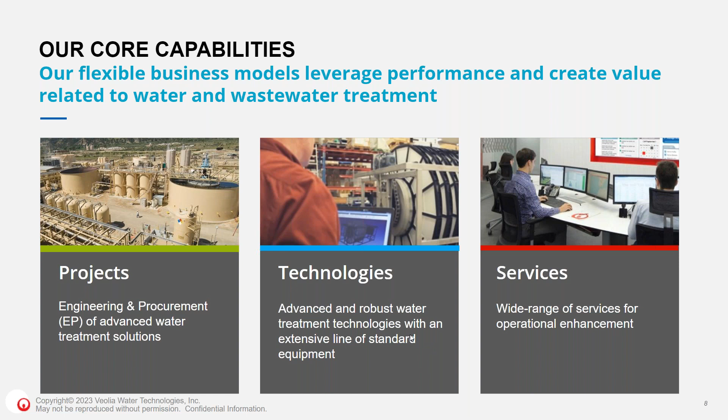So a little bit about Veolia Water Technologies. We provide water and wastewater treatment services, projects, and technologies to a variety of customers. We do that through engineering and procurement by putting processes together that are able to take influent and treat it to a required effluent specification. We also invent, develop, and improve and install really innovative technologies within this space. And of course, we support our customers through a wide range of services related to water and wastewater treatment. And we work in a variety of industries, industrial as well as municipal, and you can see those on your screen.

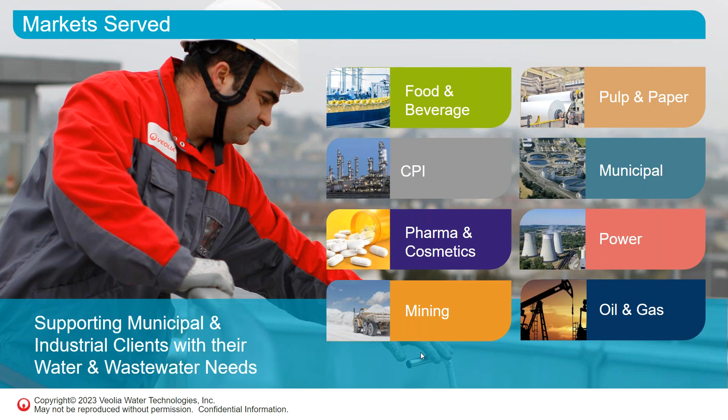Now, when we look at pulp and paper, we're a very unique company. We are multifaceted in what we do.

We have, of course, a wide range of water and wastewater treatment capabilities. You're going to hear a lot about that today on today's technical presentation. But in addition to that, we do a host of evaporation and crystallization technologies and services as well.

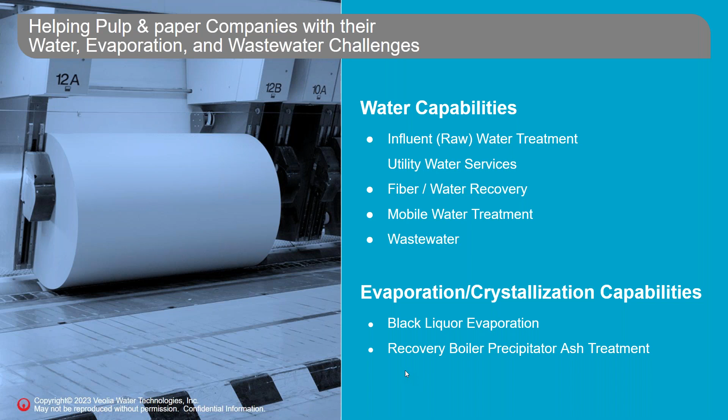So we work within the black liquor evaporation cycle. We also provide capabilities, services, and technologies to help enhance the recovery boiler and treat precipitator ash, and also recover chemicals from that particular process. So that's sort of what we do for our variety of customers around the world within pulp and paper.

In terms of our experience with pulp and paper, we do have quite a bit. We have over 35 years of experience within pulp and paper, and we have almost 1,000 global references with several trusted pulp and paper companies across the globe. It's a key industry within Veolia Water Technologies, one that we have a lot of process experience, background information, and technologies geared for this particular industry.

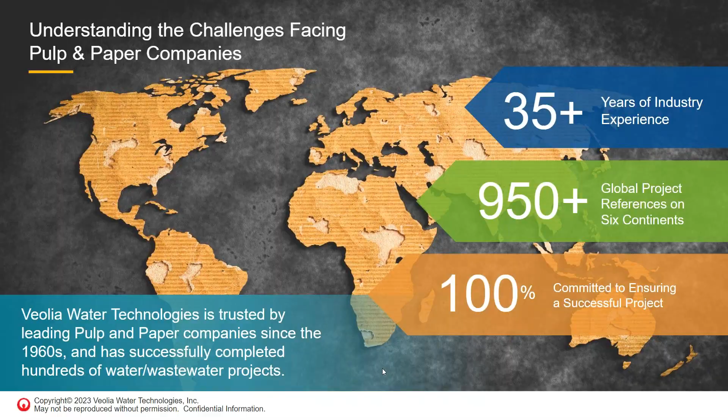So now let's get into today's presentation. I'll go through the agenda a little bit, and then we'll meet our panelists in just a moment here.

What we're going to hope to cover today: we're going to take a look at the wastewater trends and outlook related to pulp, recycled pulp and paper, and fiber recovery and water reuse. After that, we're going to look at some of the strategies used to enhance sustainability and optimize those water circuits and recover fiber that can be reused within your production. That's mainly going to be within that whitewater and de-inking loop, and we'll look at the technologies and strategies used for that particular area of a mill.

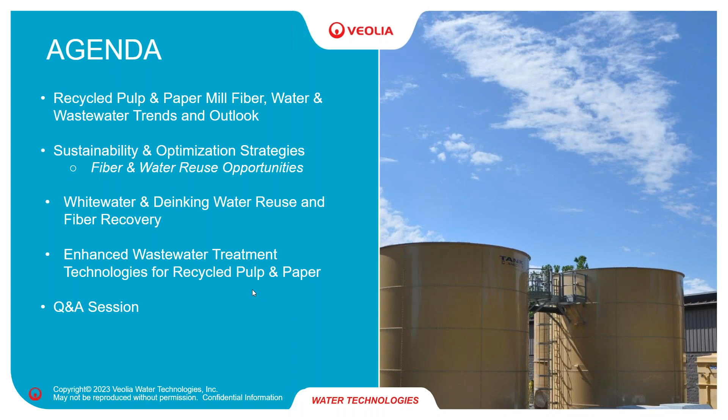Then we're going to go down the pipe, if you will, and take a look at the wastewater facility. We'll look at the process that seems to be working really well when we start to optimize these water circuits, and see what kind of wastewater treatment technologies are needed to treat that water as we start to reuse it more and more, and concentrate some of those things within that water stream. And of course, we're going to have that Q&A session on the back end of today's broadcast.

So let's take a look and meet our two panelists here. The first panelist you'll hear from today is Chris Harvey. He's the National Sales Director and Biological Wastewater and Process Improvement Specialist here at Veolia Water Technologies. He has over 20 years of experience in biological wastewater treatment, experienced in processes from anaerobic treatment to activated sludge to MBR to SBR, oxidation ditch, and biosolids processing. He has experience in starting up, design, commissioning, and troubleshooting biological processes, plus biosolids experience with sludge dewatering, aerobic and anaerobic sludge digestion, food waste and co-digestion, and biogas experience including biogas cleaning, handling, and treatment for renewable natural gas resources.

In addition to Chris, we have a second panelist we're excited to talk with today, Joseph Walco. He's a Technical Sales Manager and a DAF and Water and Fiber Recovery Specialist with Veolia Water Technologies and Solutions. For the past 23 years, Joseph has been working with the Poseidon DAF clarifier technology, helping industrial clients with a strong emphasis within pulp and paper. He has over 35 years of experience completely within recycled pulping and water treatment equipment for the industry as well. So we'll hear from him in just a moment.

The paper industry has undergone significant manufacturing changes in the past few decades, as it's embraced the use of recycled paper in mills as a raw material. There are many sources of recycled paper available to the paper industry, including OCC, ONP, OMG, RMP, MOW, and other sources. According to the American Forest and Paper Association, 68% of all paper consumed in the United States was recycled in 2021, steadily growing from about 35% in 1990.

As a benchmark, in 2018, 24% of municipal solid waste was recycled. That highlights the paper industry's commitment to sustainability. New processes inside the mill have had to be developed to enable the recycling of fibers in the paper industry.

Paper fibers, on average, are recycled 5 to 6 times, with 20% of the fibers being lost in processing due to reduction in fiber length and strength during cleaning and refining processes.

Pulp and paper mills have had to be converted and upgraded to use and process a combination of all these different types of recycled paper in combination with virgin pulp. The final products of these mills include recycled pulp, corrugated boxboard, fluting, linerboard, fluff, as well as tissue and toilet paper. The paper industry is a large consumer of water, consuming thousands of gallons of water per ton of paper produced.

Water is used to solubilize and clean the recycled paper, enhance the characteristics of the recycled pulp through the addition of water-soluble chemistry, convey the pulp, as well as dilute it so that it forms a consistent mat on the forming section of the paper machine. Water is one of the most important raw materials used in the paper industry today.

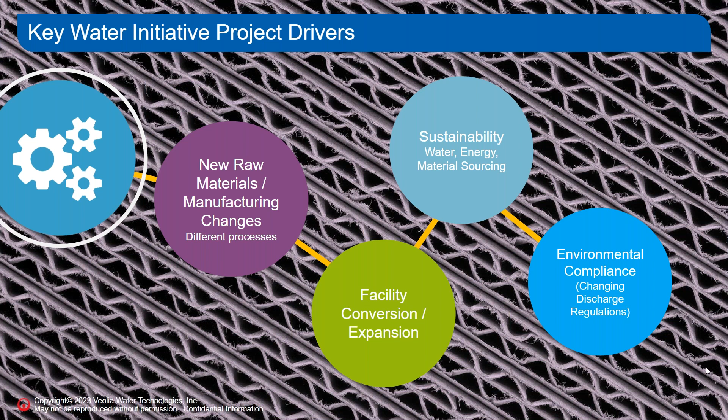Now let's talk about sustainability and water optimization strategies inside a mill.

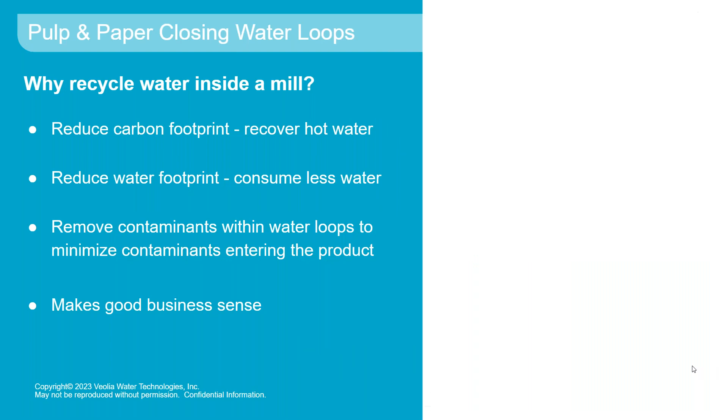As we mentioned previously, water is a key ingredient in the paper industry. The industry is one of the largest users of water and energy worldwide, with 5 gallons of water and 4 kilowatt hours of electricity needed to make a single cardboard box. Almost zero water actually leaves a mill with the end product, compared to a water bottling plant, for example. So there are opportunities inside a mill to recycle and recover water.

As shown on this slide, there are various drivers for a paper company to explore water recycling, all of which make good business sense, either to maintain the quality of the end product or to reduce the impact that the mill operation has on the environment.

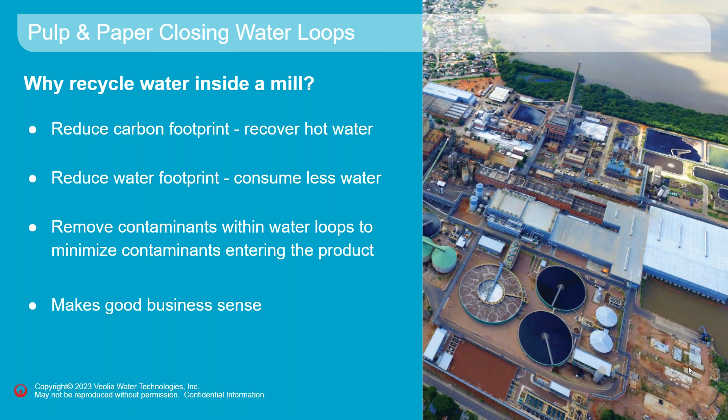However, recycling water can create operational challenges to a paper operation. Closing the water loop would concentrate up compounds that are added during production that would normally be purged from an open water loop where no water is recycled or reused.

For example, high concentrations of organic pollutants in a warm, humid environment can encourage the growth of bacteria in the paper making process. This can produce slime or an unwanted odor in the final product.

Calcium carbonate is often added as a filler. If the concentrations of this salt build up, it can trigger nuisance precipitation on the equipment and inside pipes, obstructing the flow of water and pulp.

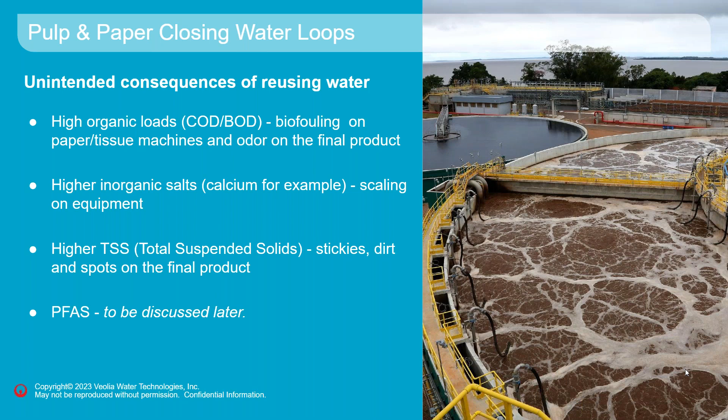Non-fiber solids that are introduced into a mill with the recycled paper can build up and reduce the quality of the final product, whether these are stickies from adhesives, wax, or other inert materials that can form spots on the final product. Additionally, PFAS, or forever chemicals, is an emerging contaminant concern that we could dedicate a whole webinar to. We will briefly touch on this at the end of the webinar.

There are both economic and societal drivers for mills to consider green energy generation from wastewater. Starchy wastewaters can be transformed into biogas using anaerobic treatment technologies. The biogas generated normally contains 65 to 75% methane, which can be used to displace natural gas fed to a boiler, be converted into green electricity, or be upgraded to renewable natural gas, eagerly sought by utility companies.

Additionally, recycling hot water reduces the energy requirement to heat raw water to process temperatures inside the mill. With the passing of the Federal Inflation Reduction Act in 2022, there are significant tax credits available for biogas facilities for pulp and paper mills.

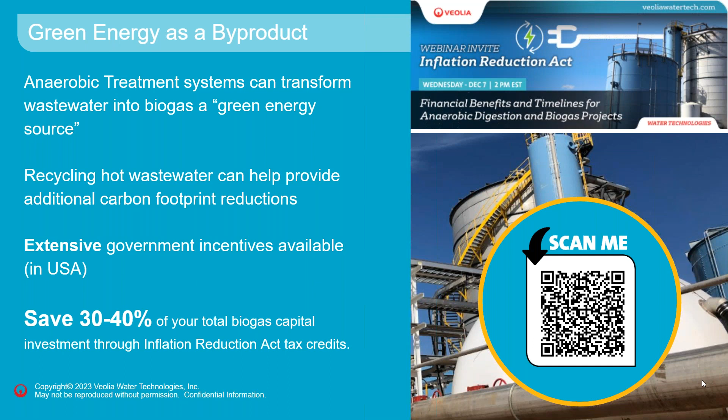The next few slides will show you opportunities for water and fiber recycle inside of a mill. There are two main strategies for water reuse or recovery inside a mill.

Short water loop recycle. A typical example of this is whitewater treatment by dissolved air flotation, or DAF, where water that drains through the forming section of the paper machine is clarified and returned to the paper machine head box or stock prep area. This water is often called whitewater due to its color. This is water recycled inside the mill. This is the main area of fiber recovery too.

Long water loop recycle. In this case, water is recycled from outside the mill back into the mill. This often involves end of pipe treatment at an effluent treatment plant where the effluent is cleaned and recycled back into the mill for reuse in various locations depending on the water quality of the effluent produced. The end of pipe treatment can be solid separation, biological treatment, or membrane filtration, but is frequently a combination of all these processes. This webinar will explore the two water recovery strategies in more detail.

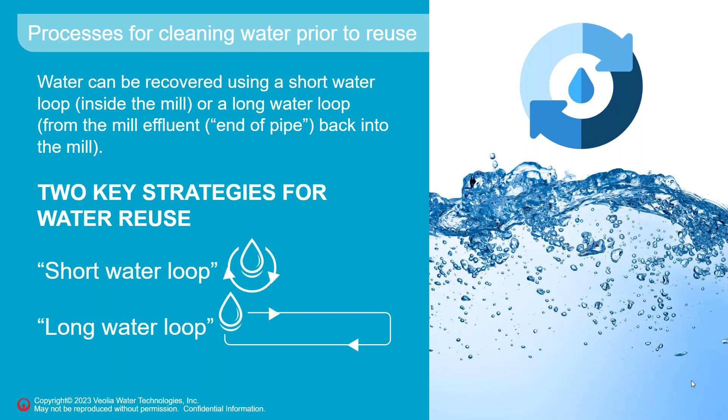The goal of short loop water recycle is to recover clean hot water for use to transport fiber or pulp inside the mill, whilst removing problematic compounds that are built up, like stickies. This process can also recover fiber that can be reprocessed inside the mill.

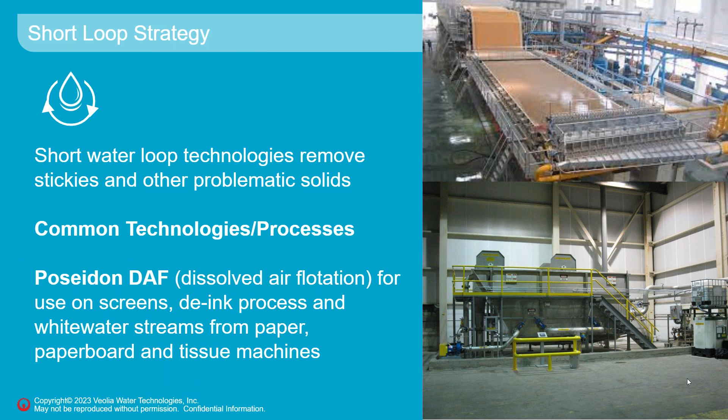Veolia's Poseidon and Saturn DAFs are some of the most common treatment processes for short loop water recycle, and often multiple Poseidon or Saturn DAF units are installed inside a single mill. Joseph will talk more about this in the coming slides.

Long loop water recycle, as we mentioned previously, involves pumping recycled or clean effluent back into the mill. Veolia has various technologies for end of pipe treatment to remove contaminants like organics, salts, and solids. Veolia's Biothane anaerobic treatment systems are becoming more prevalent, often driven by environmental and economic advantages of biogas generation from starchy wastewater. Aerobic treatment systems, clarification and filtration systems like Veolia's ZeeWeed UF and ProFlex RO systems round out Veolia's comprehensive toolbox of technologies for wastewater treatment for recycled paper mills.

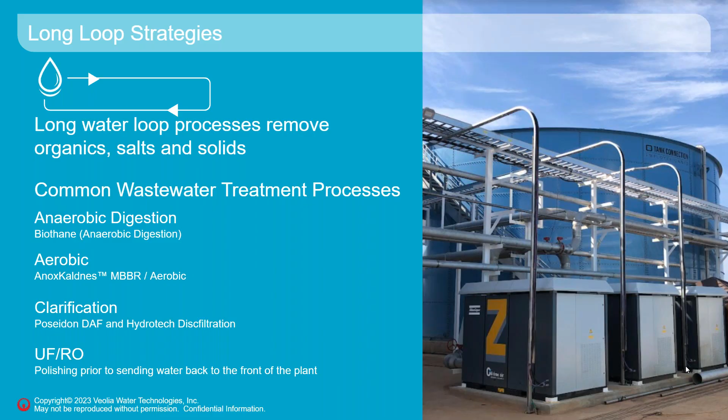We will now look at short water loop recycling inside a mill, and I'll now hand it over to my colleague Joseph. Thank you, Chris.

So here we're looking a little closer at a dissolved air flotation clarifier, or DAF clarifier, that's treating whitewater in a recycled paper or paperboard plant with a paper machine or paperboard machine, maybe a tissue machine. These DAFs can be placed inside the recycle plant, or they can be placed on the paper machine whitewater, sending water back into the pulping plant, or sending water back to the paper machine for use in the showers. So we're going to talk a little bit about these applications.

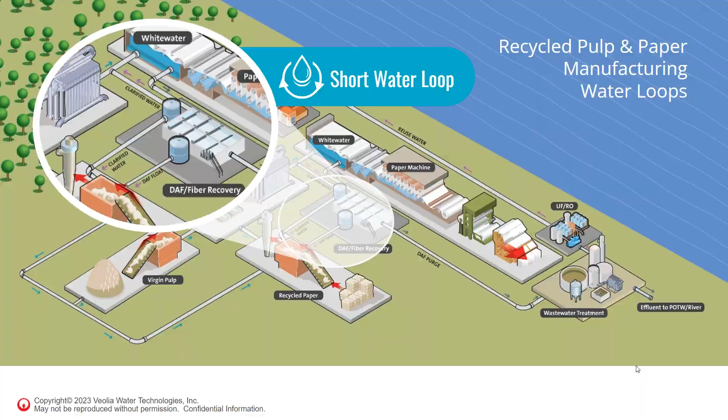And so when we talk about recycled paperboard facilities and recycle mills and deinking plants, these plants are often in municipal areas where they can get access to the recycled fiber. And real estate is often kind of at a limit. It's not like a big kraft mill out in the forest where there's a lot of real estate. So we need to conserve space, and so we've come up with designs where small footprint type DAFs can be used in these recycle and deinking and paper machine whitewater loops.

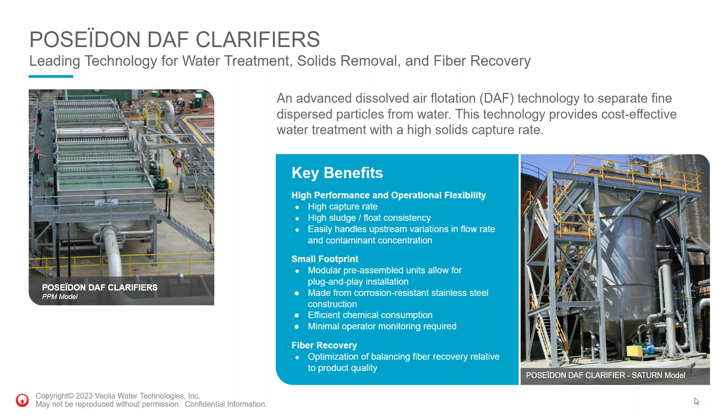And we use them for, as Chris had mentioned, water recovery as well as fiber recovery in some cases as well.

So what are we treating? I'm going to talk a little bit about short water loops.

In deinking and recycling plants, we'll typically have one or two DAF clarifiers for water reclaim. We need to remove a lot of the contaminants that build up in the water, including fines, stickies, waxes, sand and grit, fillers, and inorganic material. Otherwise, they'll keep building up within the loop, and we want to reuse this water inside the deinking plant.

If we're on a paper machine or paperboard machine whitewater loop, we want to clean up the water so we can reuse it to some extent in showers and for dilution. At the same time, in addition to saving and recovering water, we can sometimes recover the fiber depending on the quality of product we're making.

For example, many paperboard manufacturers try to recover as much fiber as possible, and where there are multiple layers, they can take advantage of putting lower quality fibers, maybe some finer material, into filler or bottom layers so they can hide away some of the recovered fiber that comes off the top of a DAF clarifier.

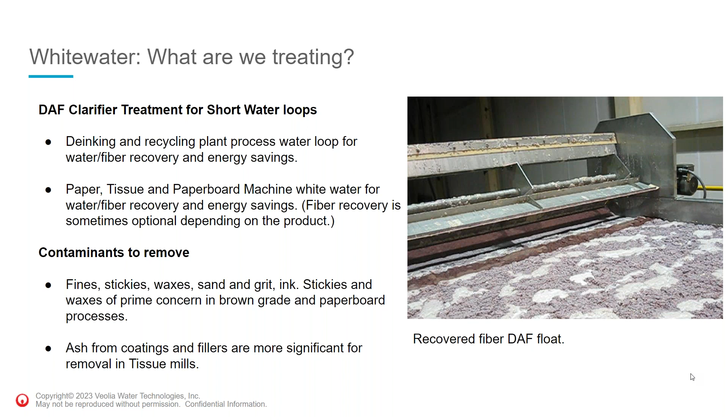Some common fiber recovery practices: we can recover fiber from the paper machine, and if it's of good quality it can be reused, certainly in the recycle and deink plant. Quite often we'll see a scalping screen followed by a DAF clarifier. The scalping screen saves predominantly the longer fiber fraction, which can be of good quality for the product, while the DAF does the proper clarification of the water so it can be reused.

Sometimes that DAF float is not good enough quality because it tends to be finer, so the fiber at the top of the DAF may or may not be recoverable, depending on the product being made. So this is kind of a fractionation process, with a scalper screen to get the longer fiber followed by a DAF.

As I mentioned earlier, the recovered material can be sent to filler or bottom layers if its quality doesn't meet the specs for the top layer of the product. For example, if there are too many stickies or wax present in the recovered material, the reuse of that material may be limited.

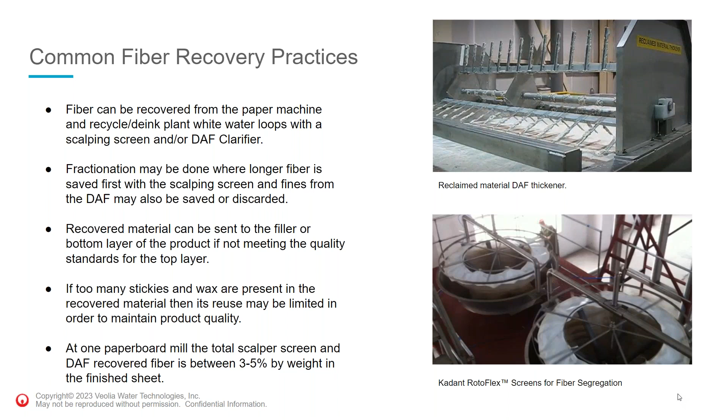Our Poseidon product line -- as I mentioned, it's very important to have a small footprint in these recycled paperboard plants. Many times we're coming into the plant as a retrofit to replace an old clarifier that has seen better days. It might be 30 years old.

It might mechanically not be in such great shape, or it's been undersized as production increases have happened over the years. So we sometimes have to come into an existing plant and try to shoehorn in a new piece of equipment while the old clarifier continues to run.

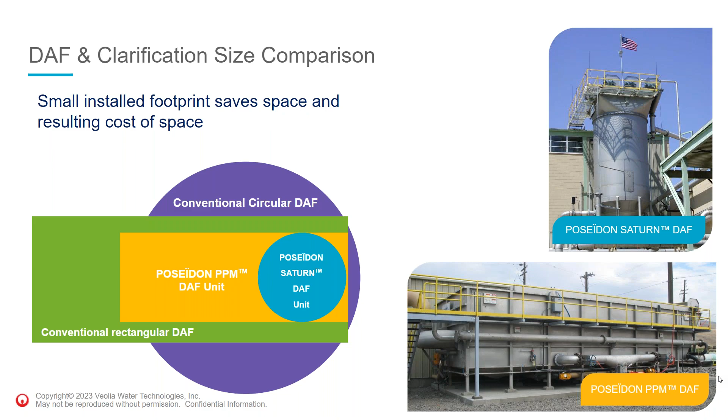So we're going to look at a case study here of a short water loop. This is a paperboard mill in the Midwest US, a paperboard manufacturer, and it needed to upgrade its recycle plant DAF clarification capacity because of an older, inefficient unit that was under capacity. So they needed to upgrade to a new DAF for water reuse and fiber reclaim.

Some of the key drivers of the project, of course, were increased sustainability by recycling the water and recovering the fiber, but also a small footprint was necessary because we had to shoehorn equipment into an existing space.

At this plant, the flow design is 1,300 gallons per minute to be treated. The inlet TSS averages about 1,500 ppm, peaks up to 2,000 ppm, and the DAF will provide clarified water at 100 ppm or less of total suspended solids, which can be recycled within the plant for reuse and dilution in the recycle plant.

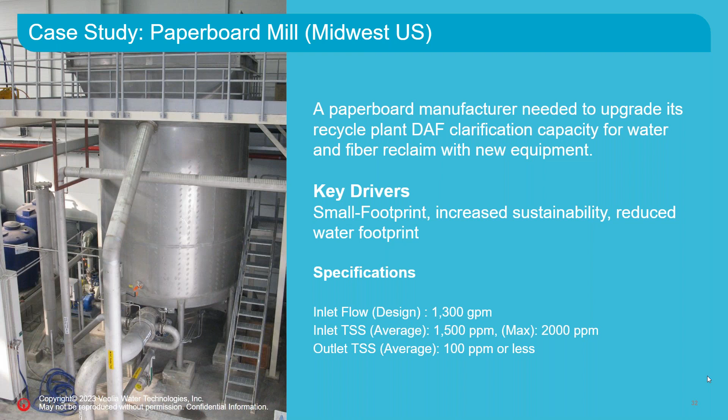So the result, got a little ahead of myself, was the Saturn model due to its space restriction. This unit that was actually put in there was somewhere between 7.5 and 10 feet in diameter. We have different size diameter units, so the floor space was very, very limited. And as long as there's enough height, sometimes the units can be put in through a second floor if there's a hole in the floor. So a space-saving vertical Saturn model was chosen due to the space restrictions, as well as the design of the unit being able to do very efficient clarification of the water.

This paperboard mill has a two-stage system for reclaiming fiber and water. They have a slotted scalper screen with 0.020-inch slots in the screen, followed by the DAF. The scalper screen will reclaim long fiber, which of course is valuable. The fiber to the DAF tends to be 80% or so of the P200 fraction, so very fine material. And since the DAF floats up this fine material, and it's largely fines, it can improve the sheet density of the final product, but it cannot be used in all the grades. Sometimes they have to reject this material if it's not appropriate for the grade that they're making on that day.

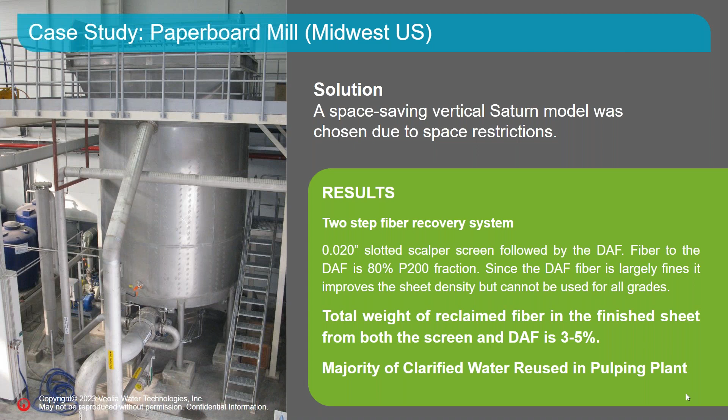When you look at both the slotted screen and the DAF, you end up with about 3 to 5% of fiber by weight in the finished product. And the most important function of the DAF clarifier is in the reuse of the water, to keep water in the system and the energy in the system.

And now I'll turn it over to Chris, who will talk about long water loop systems. Thank you, Joseph.

Joseph talked about short loop recycle. We'll now talk about long water recycle inside the mill, and how a mill can use their effluent to reduce water consumption, energy, and use.

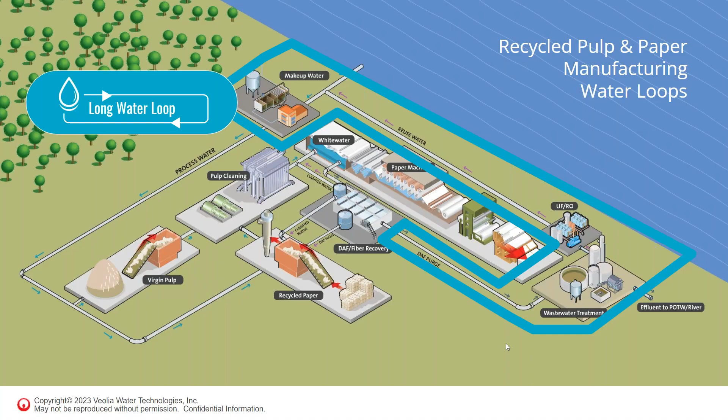What are the main challenges wastewater experts face with long water loop recycling in today's paper industry? Number one, the water is hot, over 100 degrees F, and getting hotter as water loops are closed. The hot effluent would need cooling for aerobic treatment. Two, high organic strength wastewater effluents result in high sewer fees when discharged to municipalities, and even notices of violations and limitations in discharges. Three, calcium carbonate used as a filler can concentrate until it precipitates out when the pH increases. This causes problematic scaling in pipes and vessels.

Veolia has developed a treatment process train that can solve all of these issues, allowing the hot organic wastewater to be converted into green biogas, even in a high scaling environment. We do this by producing a softened water stream that can then be used to reduce calcium concentrations to below precipitation levels, enabling anaerobic treatment.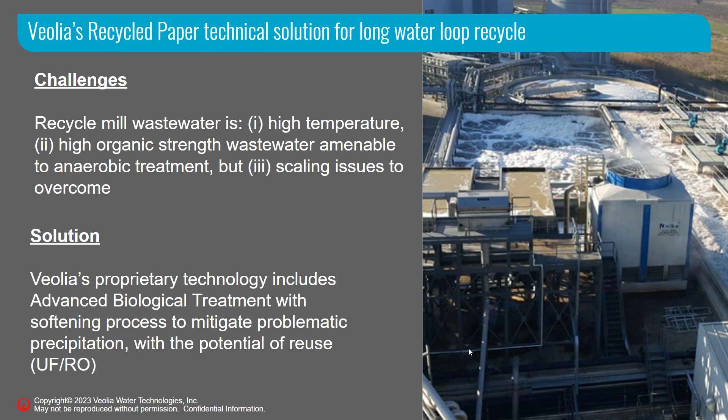By implementing Veolia's treatment process, a mill can continue to operate profitably and sustainably by reducing operating costs and reducing their water and carbon footprint through recycling hot water. Mills are often space constrained, as Joseph said, and mills' operations have evolved over the years. The Veolia solution has a small footprint to fit into most sites. This technology train has been successfully deployed at several mills internationally and in the USA, validating our treatment process. Currently, as we mentioned, significant federal tax incentives are available to help improve ROI of these projects that generate and beneficially use biogas.

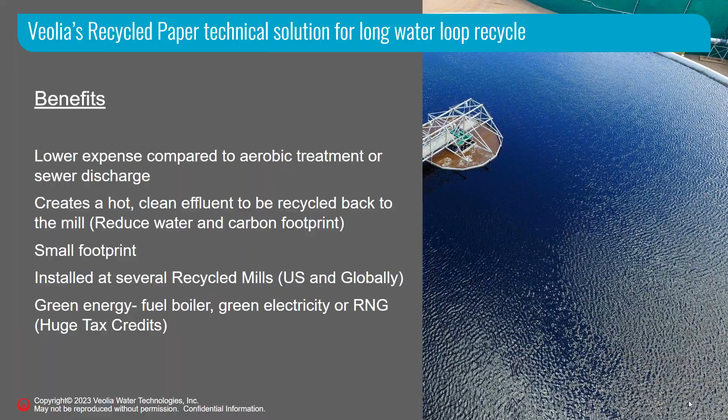Biogas scrubbing and upgrading. We've discussed biogas extensively in this webinar, especially as it pertains to the investment tax credits, or ITCs. Biogas must be beneficially used to be able to apply for these tax credits, not just flared—for example, used to displace natural gas fed to a boiler. Raw biogas contains hydrogen sulfide, or H2S, which is oxidized to sulfuric acid in a combustion device, for example, a microturbine, engine, or boiler. Veolia's Sulfothane desulfurization technology scrubs the biogas to remove H2S to very low levels prior to beneficial use.

In addition to the ITC, there are also additional tax credits available for the use of biogas as a fuel, as RNG, or renewable natural gas. These credits include RINs and low carbon fuel standards in California, LCFS. To be able to benefit from these additional credits, the biogas must be upgraded to remove the carbon dioxide. Veolia's patented MEMGAS technology is a gas membrane separation device that separates the methane from carbon dioxide in a cost-effective manner to produce RNG.

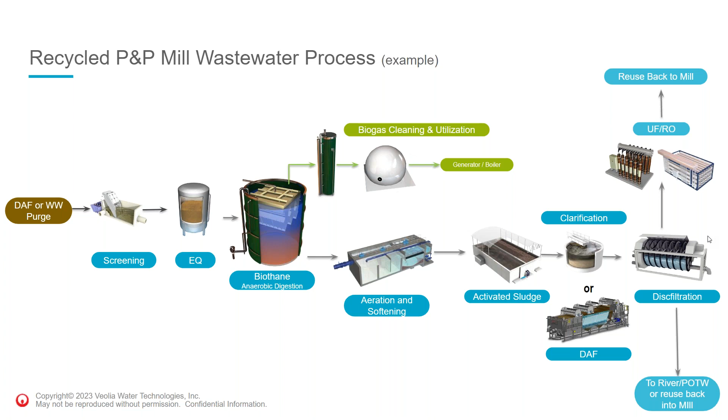So the case studies on the next few slides will show how these technologies fit together for a long loop water recycle treatment process.

The first case study is a recycled paper mill in Louisiana. This mill needed a new long loop water recycle system to meet increasing production capacity in a time critical manner. The goal was to be able to recycle some of the effluent back into the mill to replace makeup water. The wastewater effluent from the mill, generated by a previously installed Poseidon DAF, was hot, had high level organic pollutants, COD, and had a high scaling potential—all of the issues that we've discussed in this webinar.

Veolia worked with the client to develop a technical solution using Veolia technologies to meet their needs.

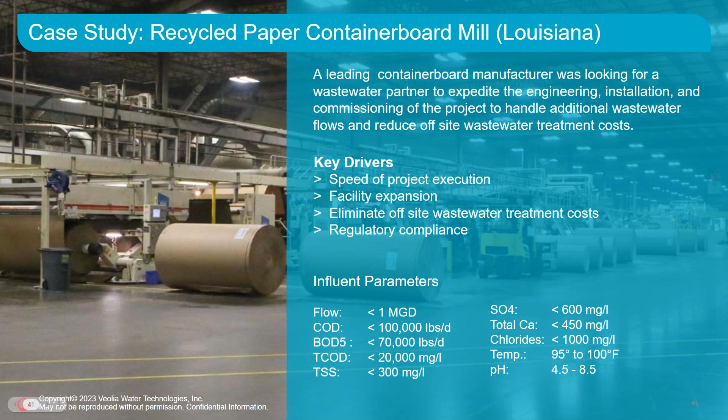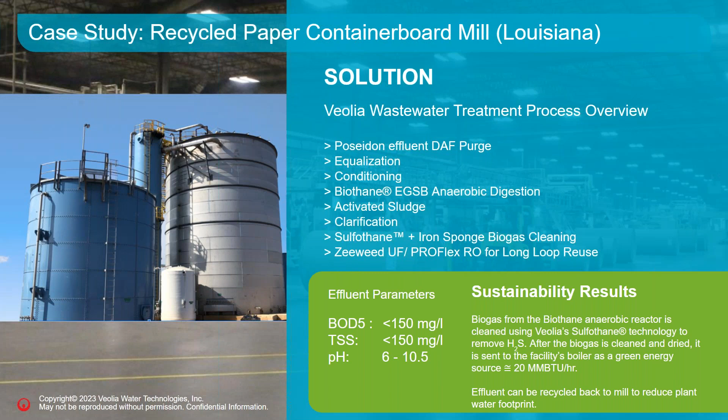The solution that Veolia developed included wastewater equalization to balance out the flow and load. Next up was Veolia's patented Biothane Biobed EGSB reactor that converted the hot, starchy wastewater into biogas, significantly reducing the organic load. The anaerobic effluent was then softened to reduce the scaling potential and fully treated using a custom designed activated sludge process. The biogas was scrubbed of H2S using Veolia's Sulfothane technology and then fed to the site's boiler to reduce the natural gas usage. Parts of the aerobic effluent were sent to the sewer and parts went through Veolia's ZeeWeed UF and ProFlex RO system to complete the long loop water recycle back into the mill.

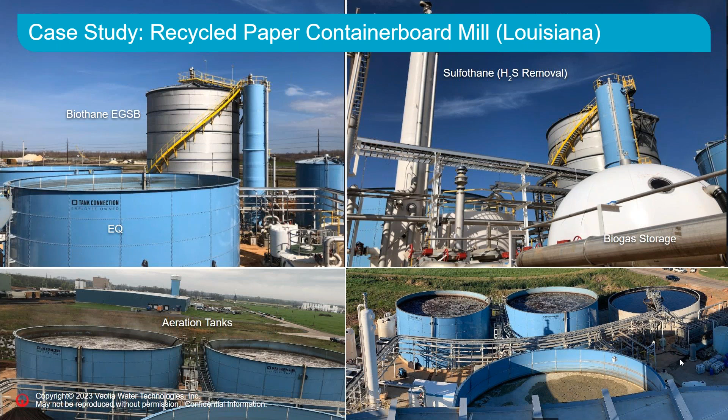The second case study is a greenfield recycled paper mill in Kentucky. This mill wanted to upfront design a long loop water recycle system to minimize water usage. The goal again was to be able to recycle some of the effluent back into the mill to replace makeup water. This is a large facility that Veolia designed to be able to treat up to 1.4 million gallons a day of wastewater and up to 140,000 pounds of organic load, generating 28 million BTUs an hour of energy through biogas.

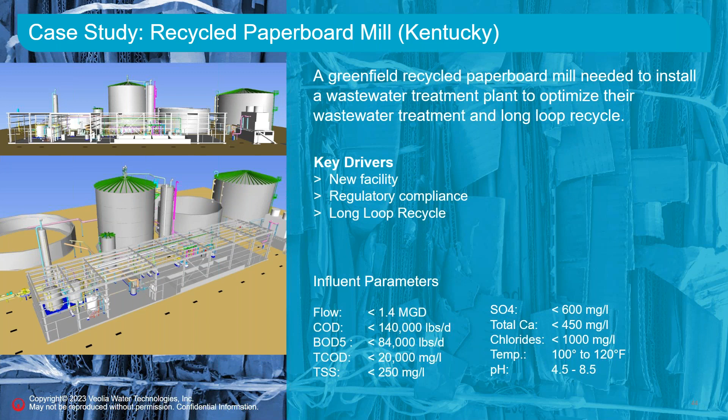The solution that Veolia developed was similar to the first case study: wastewater equalization, Veolia's patented Biothane Biobed EGSB reactor, softening, Veolia's Sulfothane biogas scrubbing, activated sludge treatment, and then water recycle back into the mill. Part of the clarifier aerobic effluent is sent to the sewer and part back to the mill to complete the long loop water recycle. UF and RO polishing will be a future addition to enhance the quality of the water to be reused.

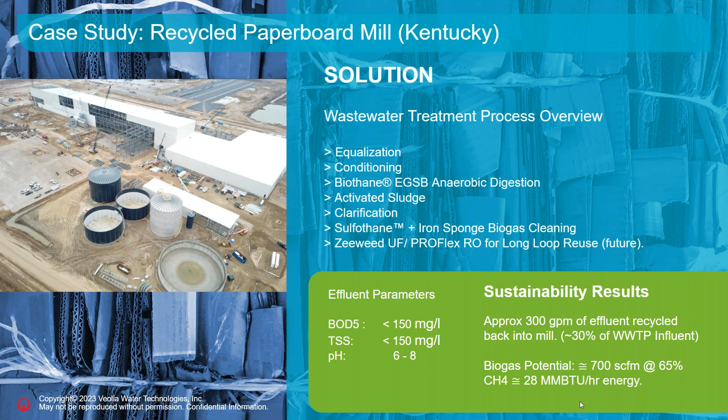In wrapping up this webinar, we wanted to discuss how a mill could start the process of considering short or long loop water recycle or fiber recovery inside their mill.

When to consider a water or fiber recovery project: if your mill operations has been tasked with reducing water use or is interested in fiber recovery, that could be the impetus to embark on a water or fiber recycle project.

If you've closed the water loop, either through short or long water recycling or recovering fiber, and you struggle to maintain quality control, that may mean you need some form of water treatment inside your mill. If you have water issues from existing or new production that result in lower quality paper that chemistry cannot solve on its own, or if you want to future-proof your operation to make it water resilient...

If you're interested in a biogas project to take advantage of tax credits - all of these are valid reasons to contact the Veolia team so we can help you start on this journey or guide you through this process to a successful completion.

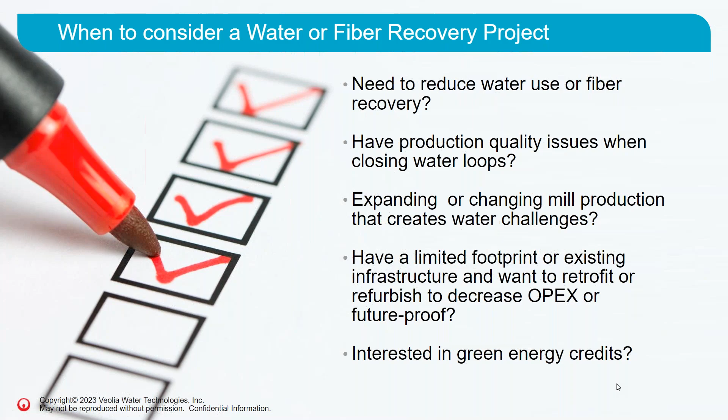We mentioned PFAS, or forever chemicals, previously in this webinar. PFAS has made headlines recently due to the state of Maine banning land application of biosolids in April 2022. The EPA has been working to develop a PFAS strategy nationally. In October 2021, EPA's PFAS Strategic Roadmap 2021 to 2024 was finalized, defining the overall PFAS strategy, including research, restriction, and remediation of PFAS.

In December 2022, the EPA released their PFAS discharges in NPDES permit memo. It is only for EPA federally regulated NPDES permits, to gather data for future effluent limitation guidelines, or ELGs, on PFAS. It recommends quarterly PFAS monitoring in sewer effluents from selected industries, including pulp, paper and paperboard industries, and recommends best management practices for PFAS elimination, reduction or source prevention.

In January 2023, the EPA released their Effluent Guidelines Program Plan, which included recommendations to continue monitoring the anticipated reduction of PFAS use and discharge by pulp and paper mills through the Effluent Limitation Guidelines annual review process. The report states, importantly, because the production of PFAS-treated paper products is low and continues to decrease, and most recovered fiber is not generated from PFAS-treated paper products, it is unlikely that recovered fiber facilities would be a significant source of PFAS discharges.

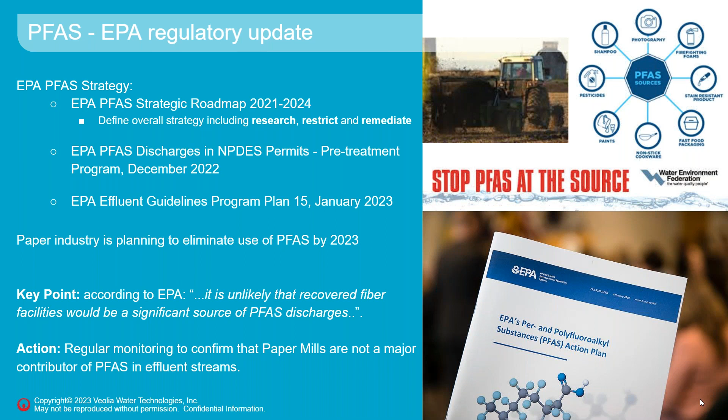So thank you for joining this webinar and listening to Joseph and myself talk about the fascinating topic of water and fiber reuse in pulp and paper recycling facilities. I'll now pass it back to TJ.